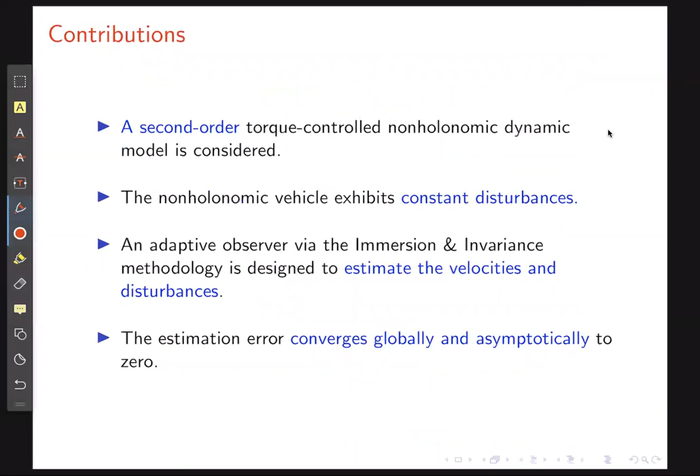In this work, we consider a second-order torque-controlled non-holonomic robot which exhibits constant disturbances. We design a novel adaptive observer via immersion and invariance technique, which we use to estimate the velocities and the disturbances. We prove that the estimation error converges globally and asymptotically to zero.

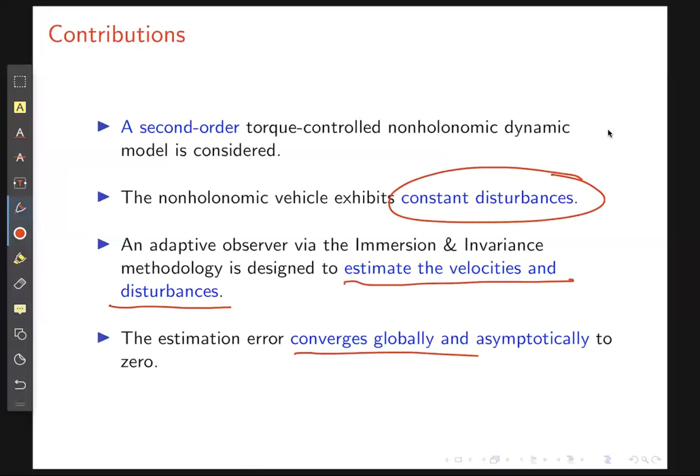The setup that we consider then is a second-order non-holonomic vehicle for which the kinematic description is given by this expression here, and the dynamics are affected by a constant disturbance. We would like to design an observer for these systems in order for us to estimate the linear and the angular velocity, considering that we have constant disturbances.

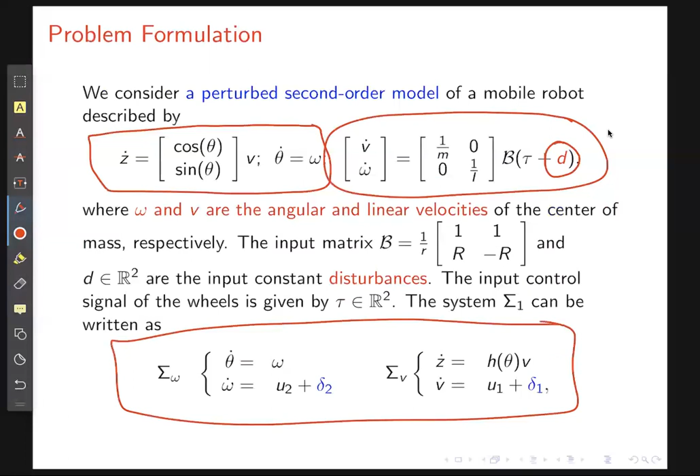So what we do first is that via a change of coordinates, we can rewrite these systems as decoupled angular and linear velocity second-order systems, which is written by using the non-holonomic restriction plus a new definition of the inputs. So by using this definition of the inputs, we would like also to estimate the constant disturbances which are given by these two expressions here.

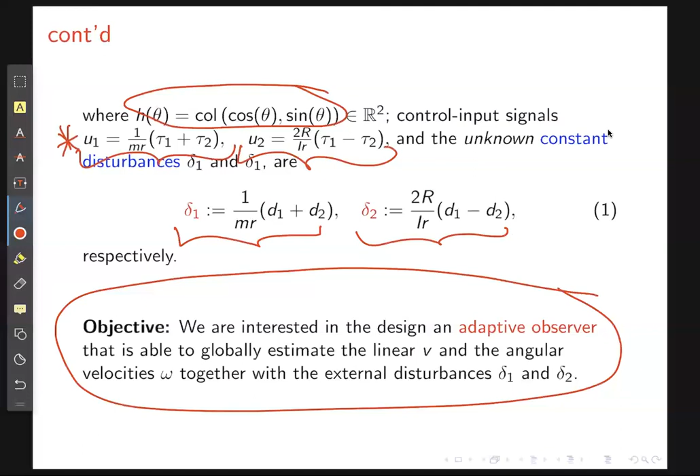So the rest of my talk and the main objective of this work is to design an adaptive observer for these kinds of systems, for which we can globally find an estimation of the linear and the angular velocities. And also, we would like to find an exact estimation of both disturbances. So, in this work, we assume that we can measure the angular position and the linear position.

The main proposition of this work reads as follows. If we consider the non-holonomic vehicle, which is given by the second-order expression that I've given you before, then we design the adaptive velocity immersion and invariance estimators following these two expressions, where subindex I means integral. We design the estimations using an integral term plus a proportional term.

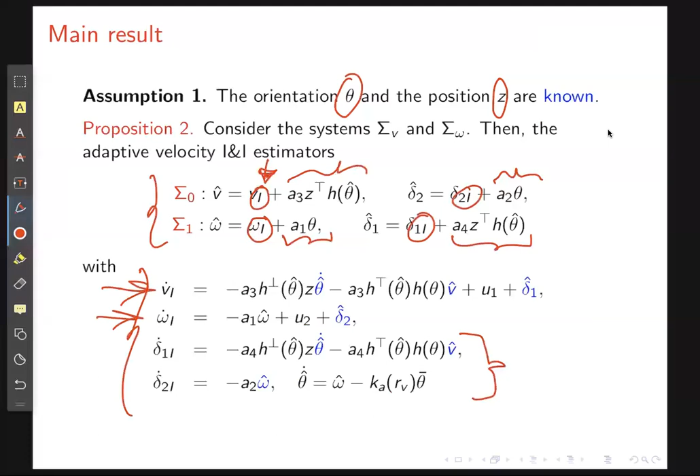So the integral terms are given for the linear and angular velocity using these two expressions, and for the estimation of the disturbances by these last two expressions. Additionally, in the design of our adaptive observer, we have a dynamic scaling factor which satisfies this expression. We use this dynamic scaling factor in order to dominate some cross terms that appear in the Lyapunov function design, as will become clear later.

So we prove and we ensure that this observer, for all initial conditions, ensures that the error between the linear velocity and the linear estimated velocity, the angular velocity error, and all the errors in the system asymptotically converge to zero.

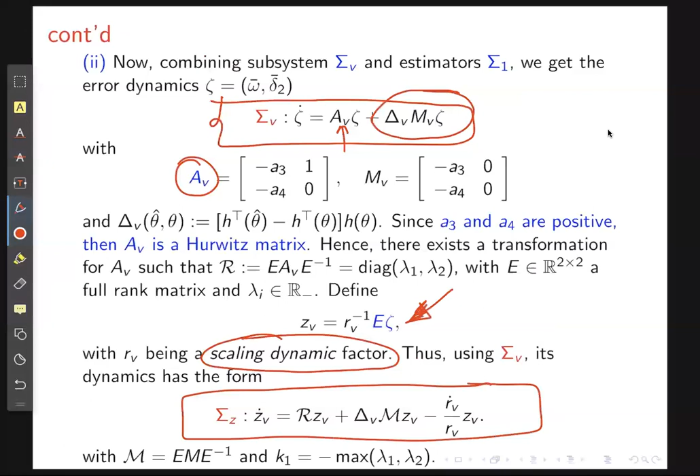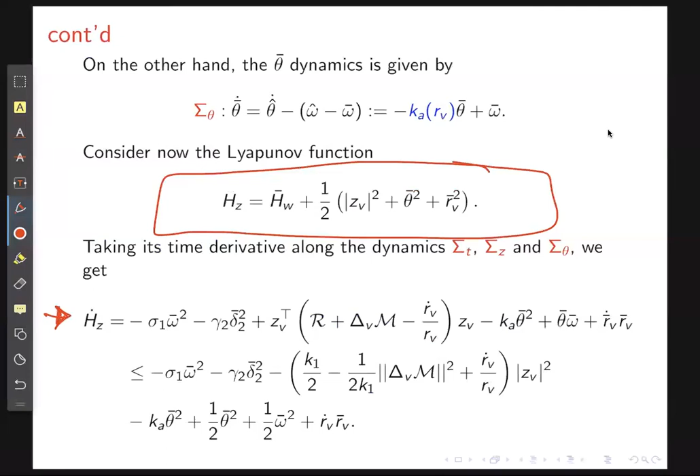So after replacing the dynamics of the scaling factor and after applying this change of coordinates, we will arrive at this virtual dynamical system for which, if we employ the quadratic Lyapunov function that is given here in this expression, we can show that the time derivative of this quadratic function along the closed loop trajectories together with the dynamic scaling factor will be negative semi-definite.

In fact, by doing this, we can show that all the errors are bounded and they belong to L2. So the proof is finished by employing Barbalat's lemma.

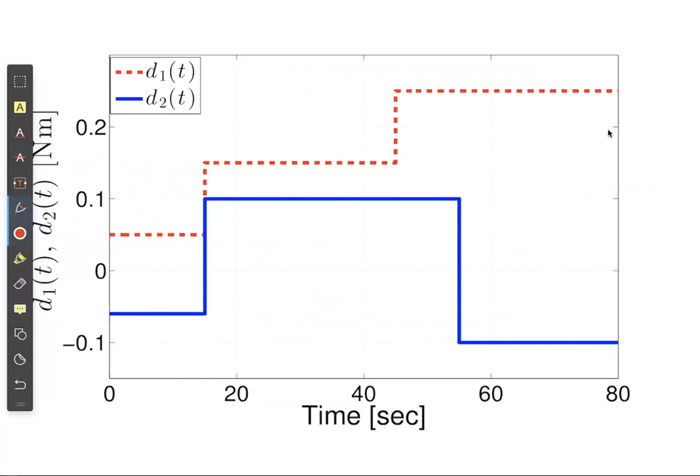I'm going to give you now some simulations, and we have two different simulations. One, which is an open loop simulation for which we only apply the estimation of linear and angular velocities, for which we consider a disturbance in the linear and the angular velocities which follow this figure here. So in this slide you can find all the necessary information for the adaptive observer design, for all the gains, and for the physical parameters of the non-holonomic vehicle.

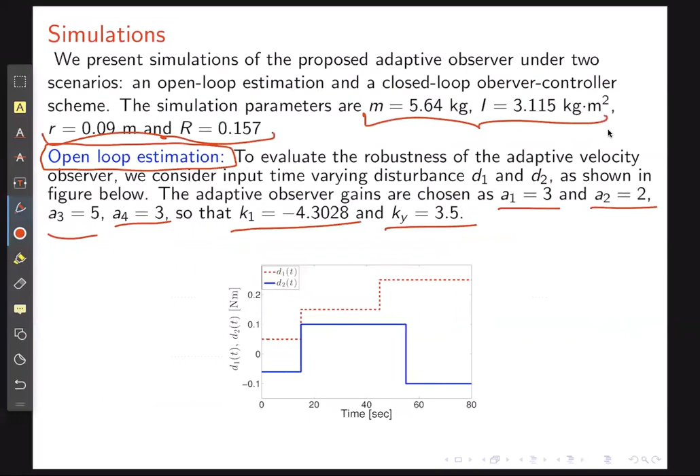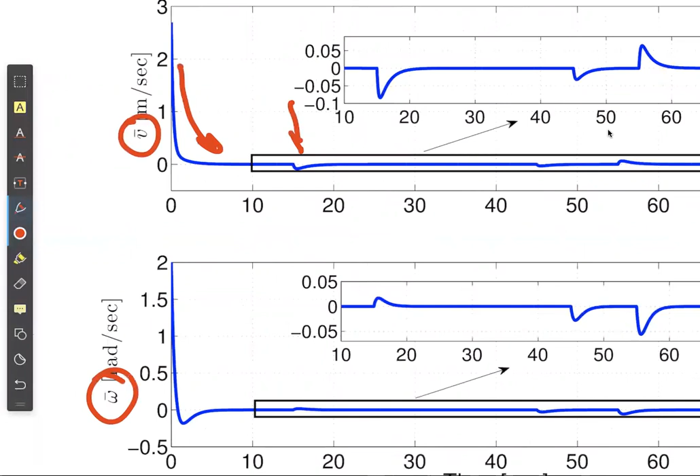So the results are pretty good. This figure here stands for the error on the linear velocity, and the figure here is for the error on the angular velocity, which of course has an exponential decaying term. At this time instant here is where the different disturbances appear, and after a transient we can see that the estimation converges to zero.

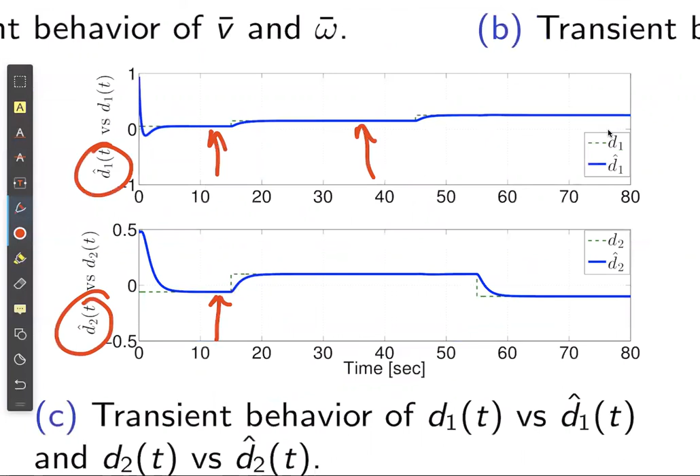This is the behavior of the estimation of the disturbance, which asymptotically converges, in fact exponentially converges, to the real disturbance that is employed in the simulations.

Then we apply a proportional derivative controller, for which instead of using the linear and the angular velocities, we employ the estimations of the linear and the angular velocity. This controller is a PD controller which exhibits a time varying term, which is persistently exciting the angular velocity in order to satisfy Brockett's condition, because the system that we're working with is non-holonomic. So this term here stands for a persistency of excitation term.

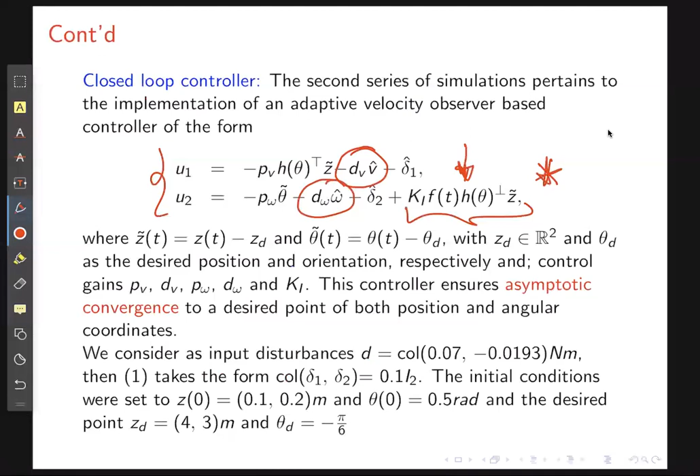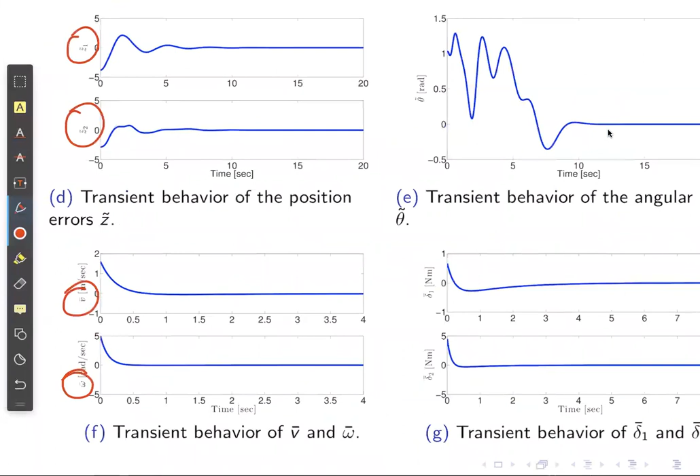So if we replace in the controller the linear and the angular velocities with the estimations that we have found using the I&I velocity observer that we reported here, we can see that the error on the positions globally asymptotically converges to 0, but more important is that the estimation of the linear and the angular velocities also globally and exponentially converges to 0. Here in these last figures, we can see the dynamic behavior of the estimation of the disturbance.

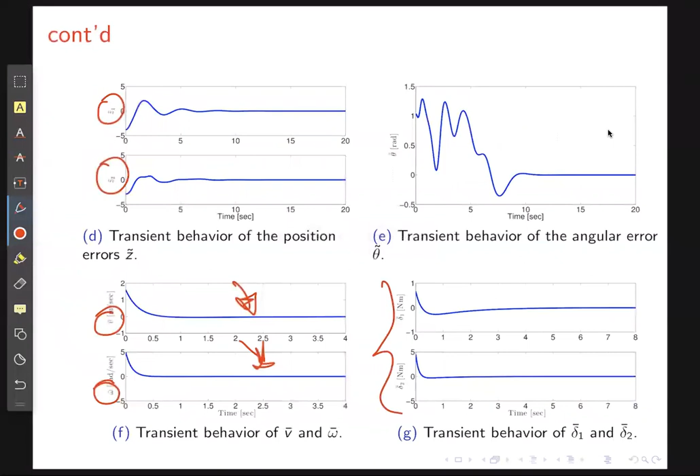So, as a conclusion, in this work, we have reported a globally convergent adaptive velocity observer with unknown input disturbances. We have shown through Barbalat's lemma and using Lyapunov theory a rigorous Lyapunov stability analysis. And through simulations, we have seen that if we have time-varying disturbances, the observer is also robust.

As a future work, we would like to extend our work to the case in closed loop with the PD controller that we have seen in the simulations. And we have also ported the I&I observer to the multi-agent case.